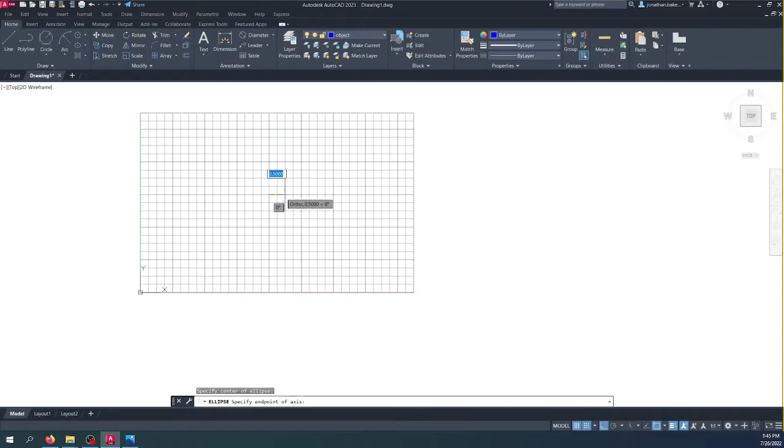First thing we're going to start out with, I'm going to make sure that my grid snap and my polar is turned on. I go up here and pick the ellipse. I'm going to go from the center, making this my center position. We're going to go at half of the 6.5, which would be 3.25, and then half of the 4.25 would be 2.125, or 1 1/8, or 2 1/8.

The next thing I would do is draw my center lines. So I would invoke the line command and go just a little bit past the ellipse through the center this way and through the center this direction.

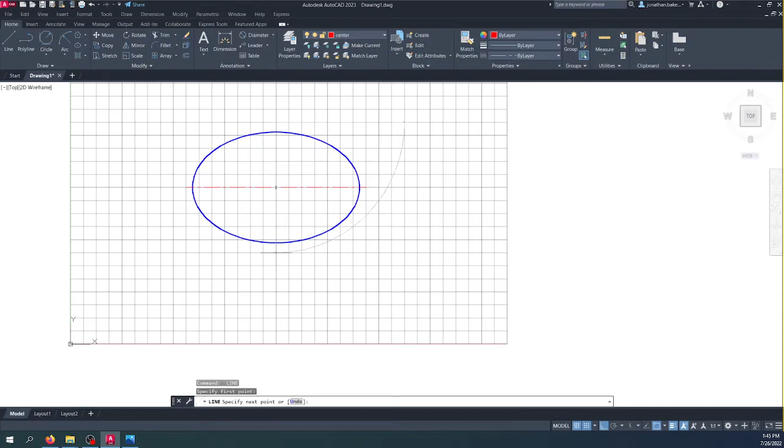Now, if we take a look at our print, we have an offset of an inch and a half here. We have another offset here to this center point of this circle, or these two circles, and that's going to be about 2.5 inches.

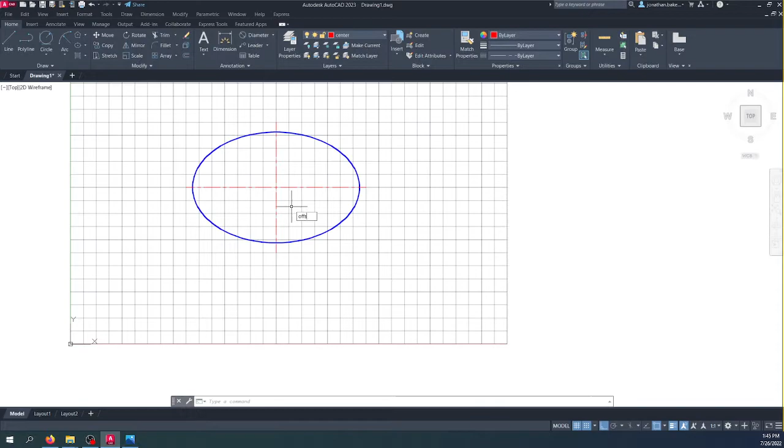So what I'm going to do is offset through this direction an inch and a half, and offset through this direction 2.5 inches.

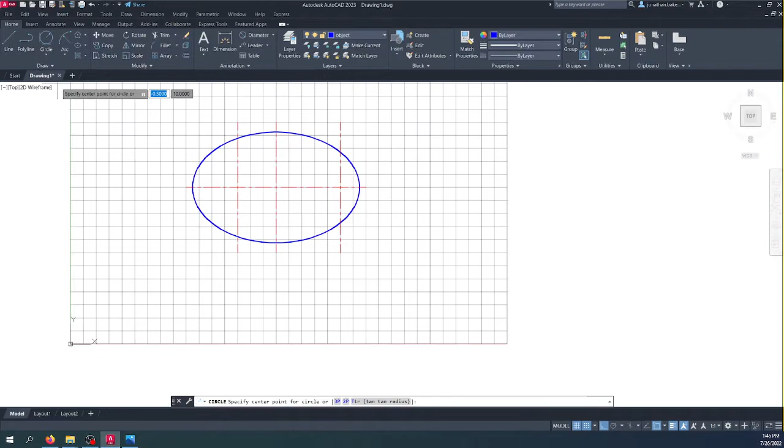Now I'm going to go back to my object lines, and go to the circle. I'm going to draw the first circle here, which has a diameter of 0.625. And there is another circle there, or a radius, that is 3/4 of an inch.

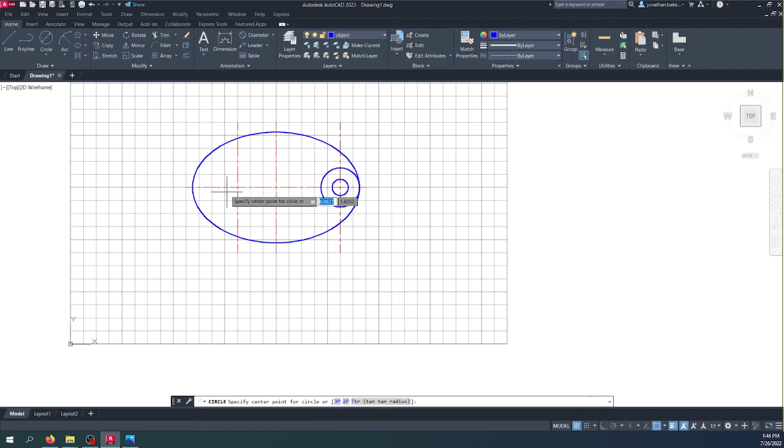I'm going to go ahead and turn my polar and my snap off. I'm going to go out to here and draw this circle, which has a diameter of 2.76.

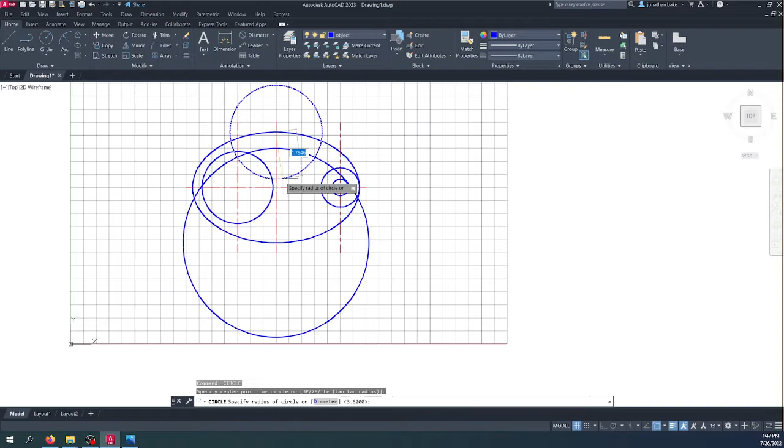Then I'm going to draw a circle from here with a radius of 3.620. I'll right click, repeat circle, and do the same thing this direction, 3.620.

Now, to get these radiuses in here, I'm going to use tangent, tangent, radius. So I'll select tangent, tangent, radius, click about right here and here, and give it a radius of a half inch.

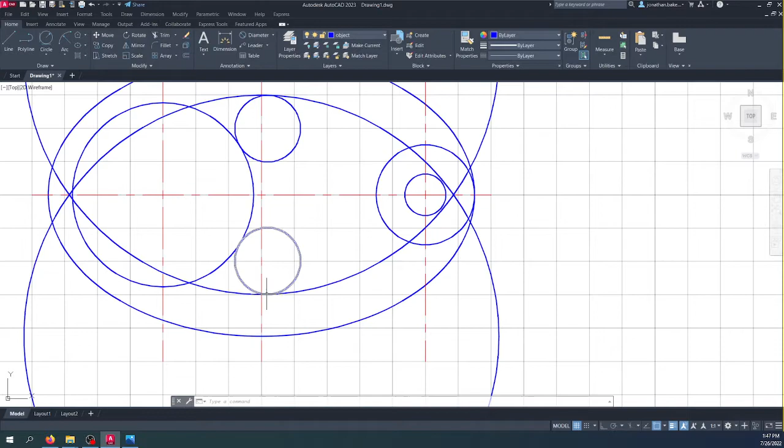I'm going to do the same thing down here. And sometimes these will go the opposite direction of where you need it to go. I will say on this print, if you leave these two circles, it will work a little better for you. What it's doing is trying to fit this circle inside the constraints of the two tangents that you pick.

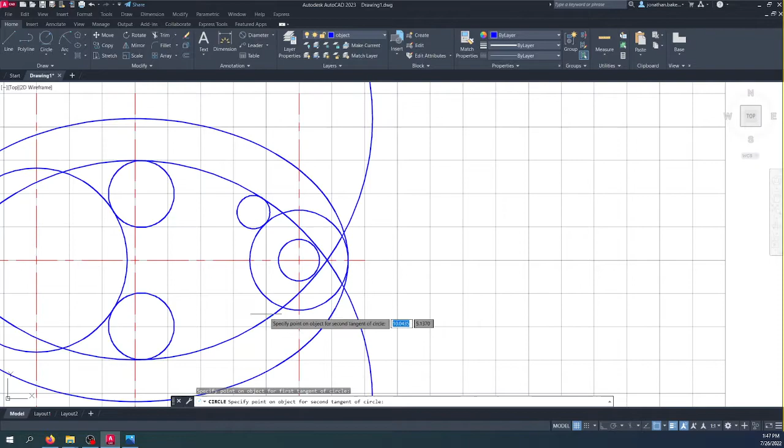So let's go ahead and add these other two radiuses. We'll go tangent, tangent, radius again, a radius of 0.25, and one more at 0.25. Now, it looks like a hot mess, I know.

So the first thing we're going to do is clean it up. Let's go to trim. I'm going to start trimming away things that I do not need for my component.

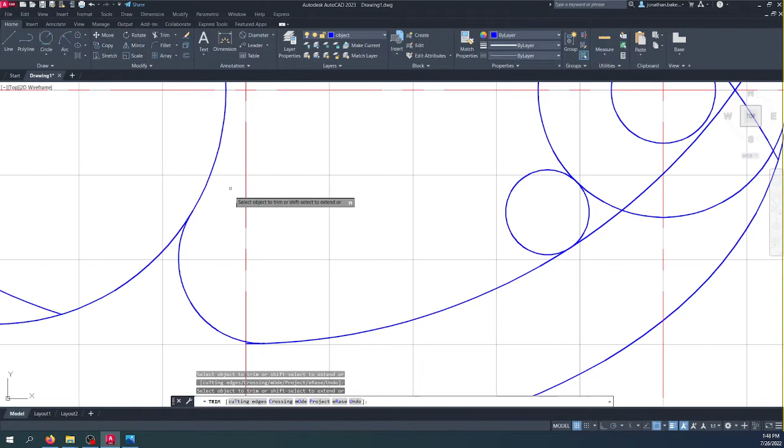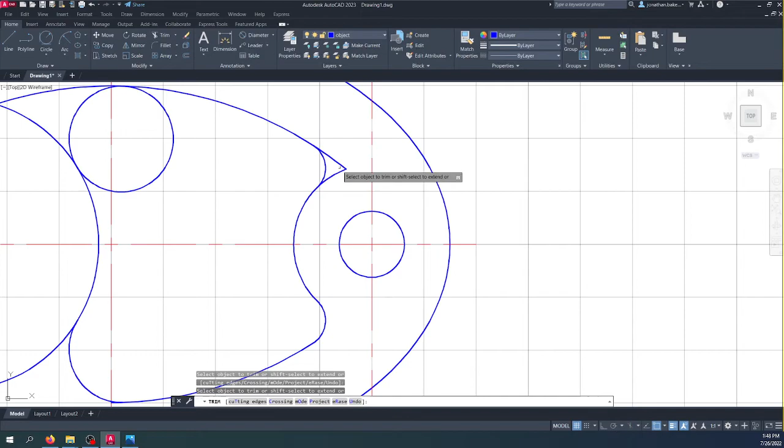Again, this is the way I would draw it. This is not the only way — with CAD, you're going to find out that not every person draws the prints the exact same way. You'll see, especially if you watch Stephanie's videos, she is phenomenal at this stuff. There's a lot of stuff that she knows, and she puts out good content.

But either way, as we trim it out, you start to see the part. It starts to look like what we have in our print.

All right, so I'm going to go ahead and add the polygon. You can either type in polygon, or you can go to the top up here and pick polygon. Either way, we need a 6-sided polygon.

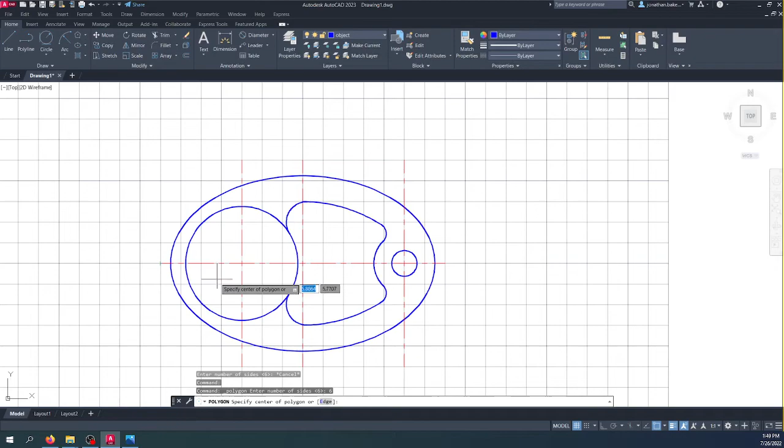It's going to ask for the center position, which is going to be centered in this circle. We're going to circumscribe the circle, and according to the print, it's an inch and a half, so the radius is 3/4 of an inch.

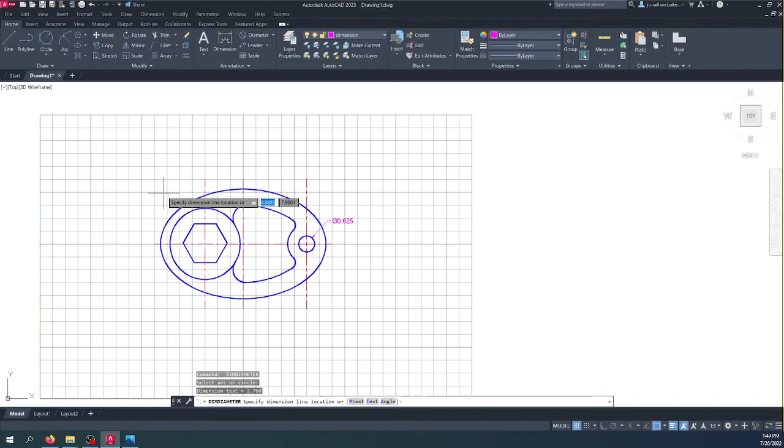All right, so let's start dimensioning this thing. I'm going to go to my dimensions layer, and since I'm stuck in diameter, I'm going to dimension this diameter, and I'm going to dimension this diameter. I'm going to go from there.

Let's go ahead and get some radius dimensions. I'm going to get a radius there, and a radius here, a radius here, and a radius here.

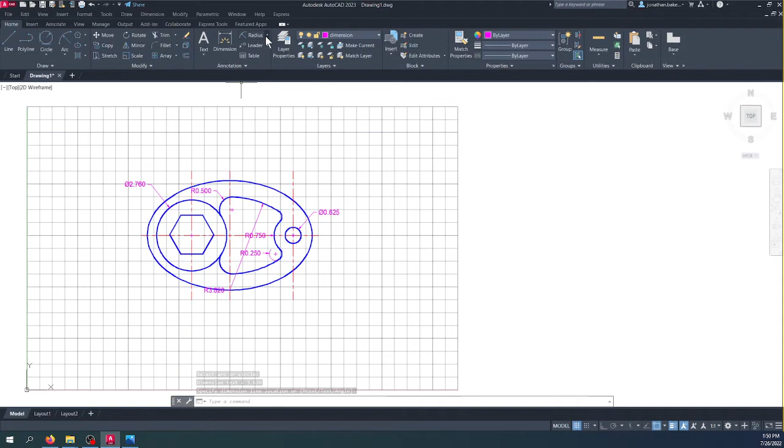Then I'm going to go and do my linear dimension, get that polygon, and the overall of the ellipse, the width of the ellipse.

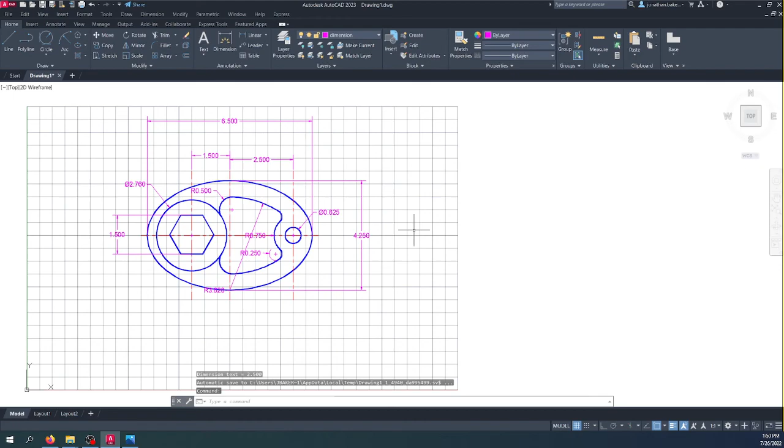I want to get from here to here, which should be 1.5 inches. And even though it's not shown, I'll go ahead and give you the dimension there, 2.5 inches. All right, so that is the drawing, or how I would draw the special cam.